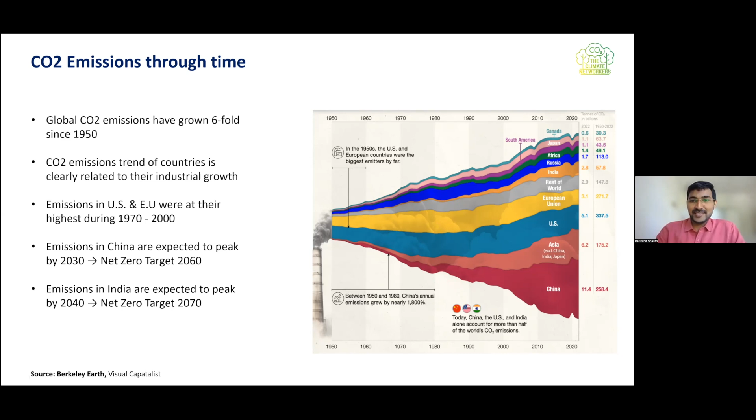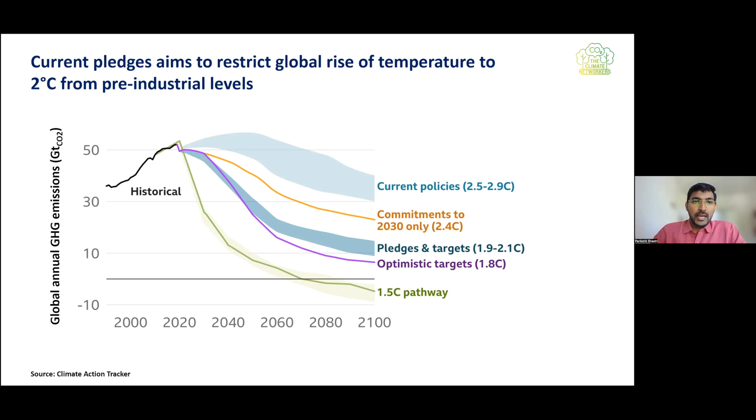Again, it relates to the different transport field or also the building industry. Luckily, I come from the building industry, which is basically the cement industry. Cement industry is one of the major emitters of CO2. That also means there is a very high potential of CO2 mitigation in this field. Based on this, I would be able to give you a nice perspective with regards to what could be different CO2 pathways that have to be implemented in the cement industry.

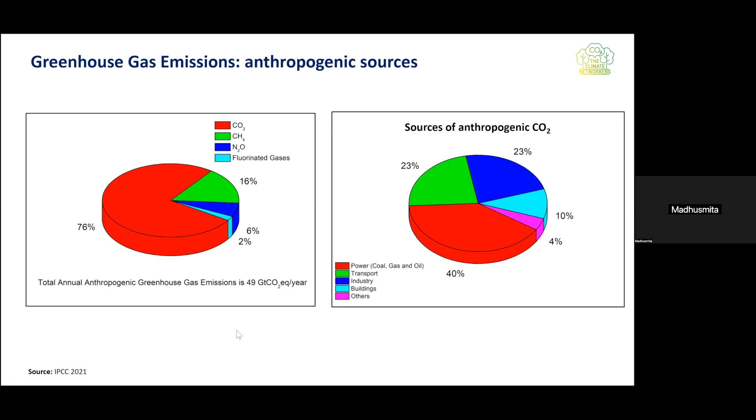Yes, please continue. Okay, so this was more or less about which is the greenhouse gas that we need to target, and on the right hand side we see which are the industries that we need to target when it comes to the mitigation part.

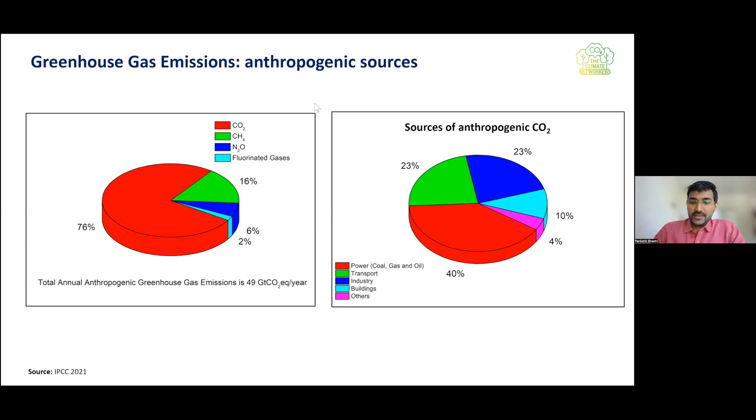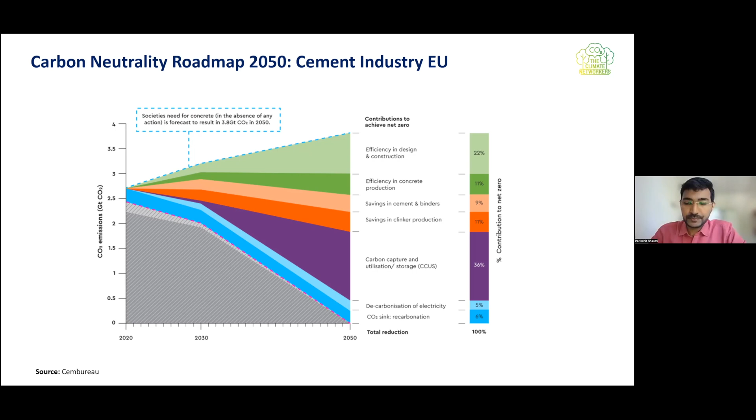Typically there are two major sources. One is the diffused source, which means CO2 that we see in the environment around us or in the air. It's called a diffuse source because the CO2 concentration is minimum, approximately 300 to 400 ppm.

Another source is a point source, basically the industrial sources of CO2. Here we find CO2 in percentage at the stack area, which is basically 5% to 30% when we come across this stack area. The stack area is at the end of the process in, let's say, a cement plant or power plant, where we typically have 5 to 30% CO2 on a dry basis.

So what we see is it depends on exactly where we would like to remove CO2 from - is it a diffuse source or a point source. Based on this, the carbon capture technologies are implemented.

Again, once the technologies are implemented, what we get is either a liquid CO2, most probably, or it could also be a gaseous CO2.

Then it comes to the transportation part. There are different modes of transportation that we would be seeing in detail. And then we get an option - should we go for storage or should we go for the utilization part? This depends clearly on the business case in a particular region.

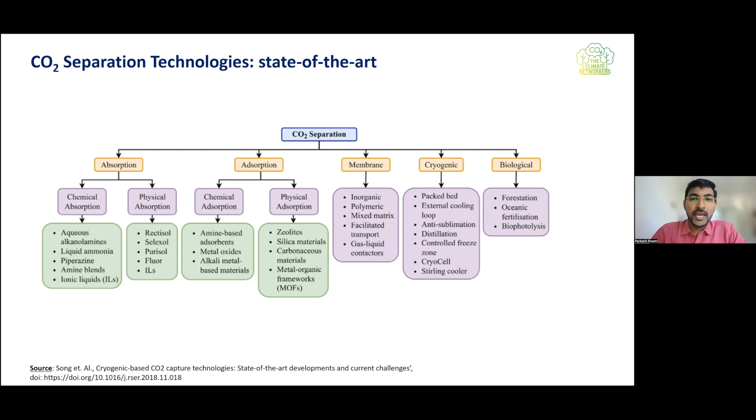This is not something that is typically done. The technology has to be implemented in a relevant atmosphere or environment, and then based on that it is upscaled to the different industries or kilns. Then what we see is typically the post-combustion and pre-combustion processes, which are technologies at a higher technological readiness level.

So what are typically post-combustion capture technologies? We have already seen these. Post-combustion means once the combustion has taken place, these carbon removal or carbon capture measures are implemented at the downstream part of a plant, meaning once the flue gas has been treated and cooled down, just before it is sent to the stack, we remove a part of the flue gas and treat it. This happens after combustion, so it is called post-combustion capture.

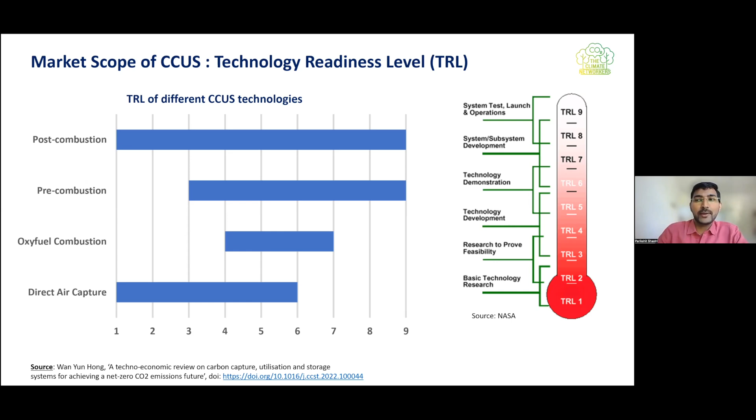What I have selected is a post-combustion capture technology, which is quite prevalent in different industries as of now. I would like to give an overview from an industrial perspective based on ongoing industrial projects so you get an idea of how exactly that is implemented. Coming to post-combustion absorption-based CO2 capture, this is based on a solvent absorption process.

What happens here is that flue gas, taken from the downstream part of the plant just before it is sent to the stack, has a major proportion of dust removed, giving us our raw flue gas. Initially, what we have is this CO2 gas or flue gas at approximately 100 to 150 to 200 degrees Celsius, depending on which point it is taken from.

It is important that we cool down this gas. Inside the carbon capture system there is a pre-treatment part, wherein we cool down the gas before it is sent to the absorption tower. This cooler could be of different types—it could be a quench cooler wherein we circulate cooling water in a counter-current flow, or it could be a coil heat exchanger. But typically what is used is a quench tower. So the flue gas is cooled down and then sent to the absorption column.

Now what happens is in the absorption column, we have a solution which is absorbent, and that solution is sent from top to bottom, and our gas goes from bottom to top, and they have a counter current exchange. And what happens, because of the affinities of CO2 molecules towards the solvent, this CO2 is just trapped in the solvent. This solvent goes to the pump, and from this pump it is sent to the desorption column.

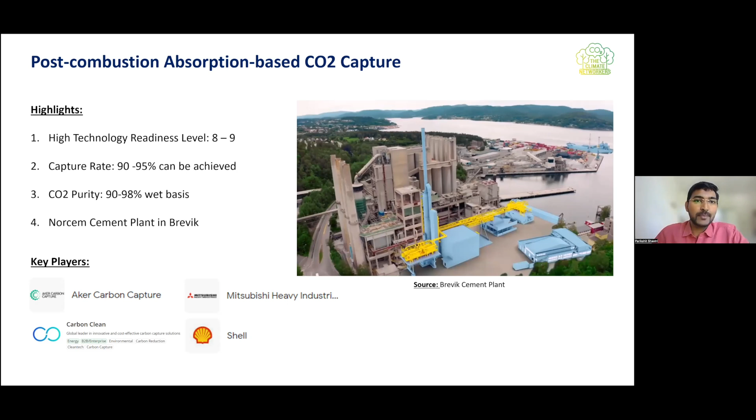Now, this was about the absorption process. Absorption process, as I mentioned, is again a post-combustion capture process, and it is at a higher technological readiness level.

So the next part that we are going to see is a membrane-based process. Membrane-based process is something that we are seeing has been recently implemented. It is not at a very high technological readiness level, but again, what we see is it clearly depends upon how the business case is, what is the capex, and what is the opex for this particular plant.

These membrane processes are driven based on the permeation rates of individual components. What we see is the flue gas is typically taken in, and as I said, this flue gas requires a pre-treatment. If that has to be temperature regulated, the dust has to be removed. It's like in cement plants, we have significant amounts of dust in the flue gases, and therefore it is crucial that we remove this dust before it is sent to membranes, to avoid choking. So if our flue gas is at, let's say, 200 degrees Celsius or 150 degrees Celsius, it has to be cooled down to, let's say, 30-40 degrees Celsius, depending upon what kind of membranes we are using.

Again, what happens is flue gas is sent to the membranes, and based on the permeation rates or the permeability of the membrane - basically the performance of the membrane - we see the selective absorption or selective permeation of CO2 over the membrane to varying degrees, and based on that, the first degree of separation occurs.

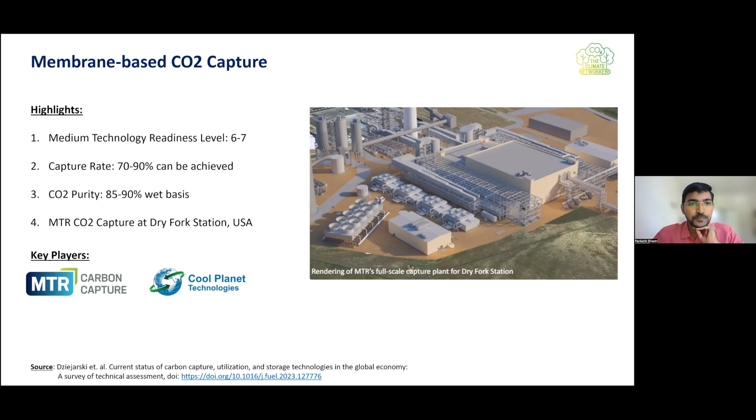So if we look at a situation where we are given food grade purity as our target, we can easily see that we won't be able to reach it with either of these two technologies. That's where the final concentration or final treatment of CO2 comes into play - that is cryogenic separation. There are different players as far as cryogenic separation is considered.

Importantly, the feed gas here should have a purity of minimum 85 to 90%. It doesn't make sense to implement a very expensive cryogenic process at the start of our process, where we have, let's say, 5 to 30% flue gas concentration, because firstly it is a high pressure process, and high pressure involves significant compressor energy.

So it doesn't make sense to involve cryogenic separation at the start of any capture concept. Typically, this separation takes place based on the condensation and desublimation properties of the gas. The feed gas initially goes through a dehydrator, or dryer, based on typically temperature swing adsorption processes. This feed gas, which has moisture in ppm areas, is sent to the separator, which could be a kind of Joule-Thomson effect triggered separation, or it could also be a rectification column depending on the concentration at the start of the flue gas.

So what happens here is it is cooled, sent to the Joule-Thomson expansion device, and then sent to the rectification. Here again we have a reboiling part, which boils out the CO2 and the inert gases, and these inert gases are sent back to the compressors.

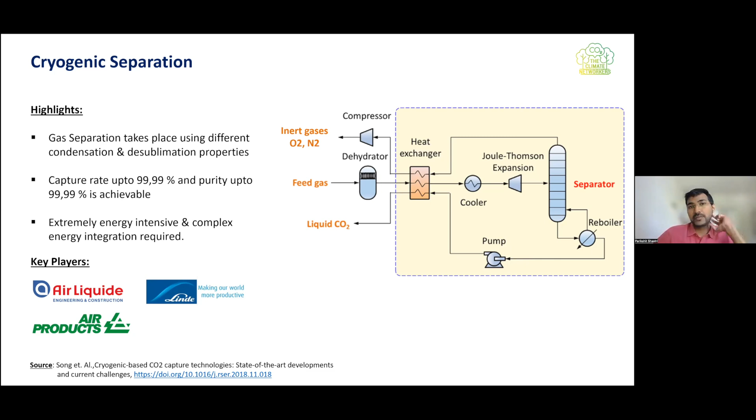So typical players are Air Liquide, Air Products, Linde. There are new players like Chart or something, but they are kind of limited to particular geographies. So as a chemical engineer, we have to look for different technologies that are there, what technological partners they work with, and based on that proceed with the implementation part.

Which basically means, and that is the beauty of the entire process, a chemical engineer has to understand what is the current concentration of flue gases and where exactly we have to reach, what is the business case, and based on that select a technology that is a combination of energetically most efficient processes. That's the beauty of the entire process, and something a chemical engineer should find challenging as well as interesting.

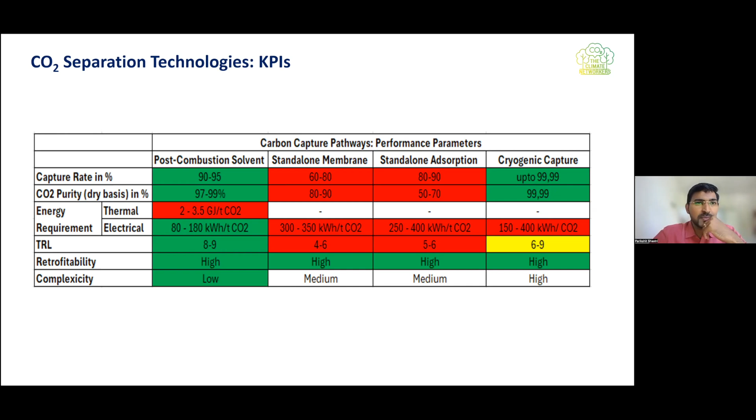So this was about the KPIs, key performance indicators, of different separation technologies. Now, once it is captured, what is important is how exactly that could be sent or transported. Again, there are different ways, different transport methods: it could be pipeline, ship, truck, or rail.

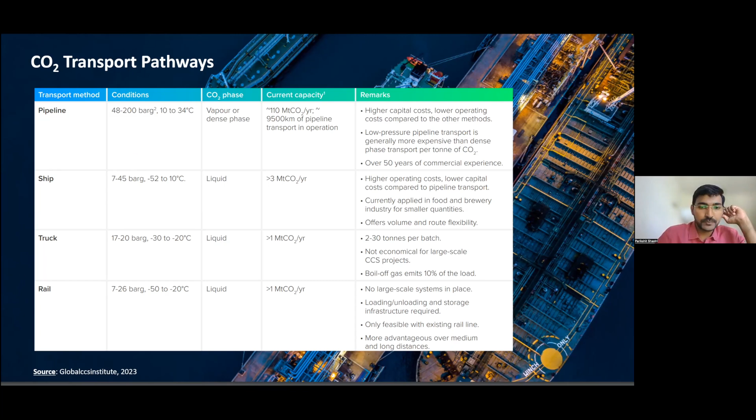This is a very interesting project. Many students who are already familiar with this Northern Lights project must have knowledge regarding this. This is the same project I showed initially when demonstrating implementation of post-combustion capture in a cement plant. It's the same cement plant we see here. CO2 is stored on shore, and since it's very near the port, CO2 carrier ships are implemented. These carrier ships take the CO2 and send it to an intermediate storage. The intermediate storage is then responsible for reaching a particular condition of temperature and pressure, so that it would be suitable to be injected inside the saline aquifers. This video will make clear how exactly this process takes place graphically.

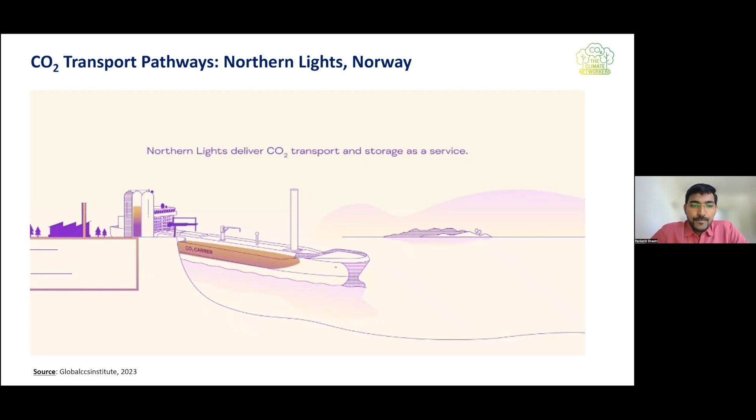So this is that intermediate storage or terminal.

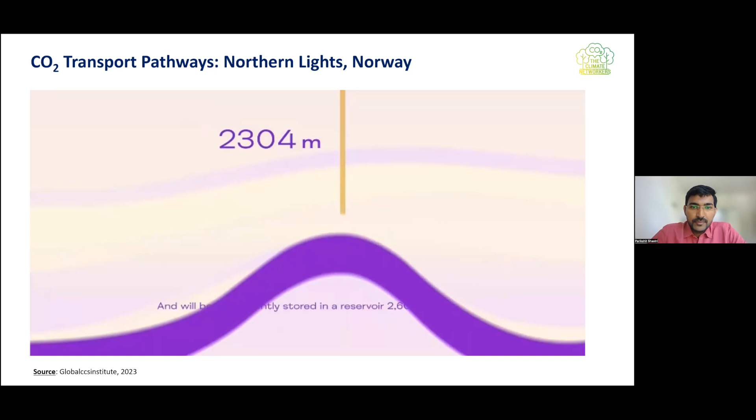What we've seen is basically a typical capture site. Since that capture site is close to the port, we could have ship transport. In ship transport, the CO2 is stored at an intermediate storage, which is the final step for adjusting process conditions before the CO2 is sent to the subsea level.

Once these process conditions are reached, it is pumped through insulated or uninsulated pipelines in a single phase, that is liquid CO2, and sent to reservoirs deep, let's say 2 to 3 kilometers undersea. This is quite crucial regarding what kind of licenses are foreseen for different companies. The North Sea has become a hotbed for CO2 storage, and you'd see news of more companies buying licenses for CO2 storage there.

Now this was more or less about the transport. What is important is to understand how exactly CO2 is stored. There are quite interesting views and counter views. What would happen if the CO2 comes out? When would it come out?

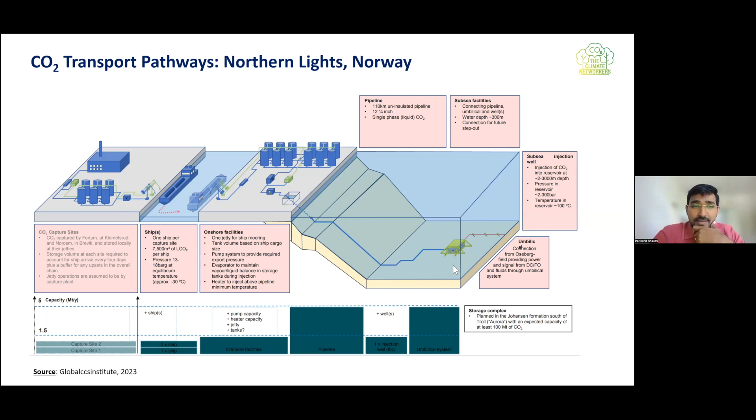Typically, there is an injection well, which we can see here. Let's focus on the left part first. There is always an injection well, as shown in the initial graph at this point, sending CO2 inside beneath this particular station. This injection well makes sure the CO2 is sent to a rock formation which is sandstone rock. Sandstone rocks are typically porous, allowing CO2 to move freely. Such a formation is selected, in this case a Johansen formation, with a layer selected such that there is a cap rock above it.

So this is typical for the Northern Lights projects, or projects more or less focused on the saline aquifer level. This was an overview of the different technologies we saw.

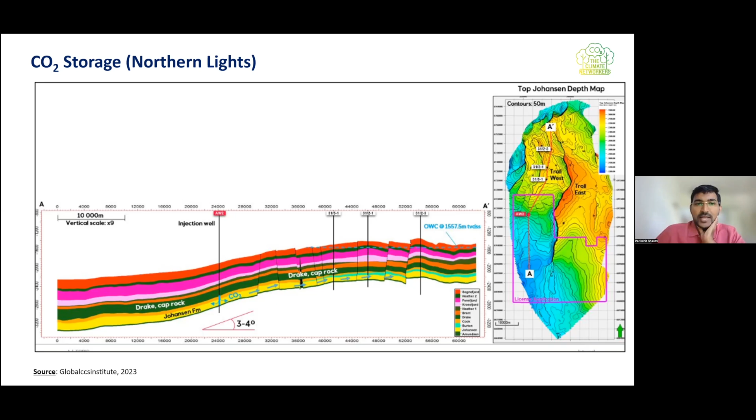For transport and storage, it is very important what the end CO2 purity is. It depends on different CO2 off-takers and how exactly they specify product purity. One example is Northern Lights, which specifies CO2 purity as high as 99.81%, with impurities literally in ppm ranges.

Some impurities could be in ppb ranges, parts per billion. It's not only about main components like CO2, O2, or N2, which are in percentage areas, but also about other components like ammonia, amines, formaldehyde, mercury, etc., that are typically even in ppb levels. Mercury, for example, has to be in ppb levels.

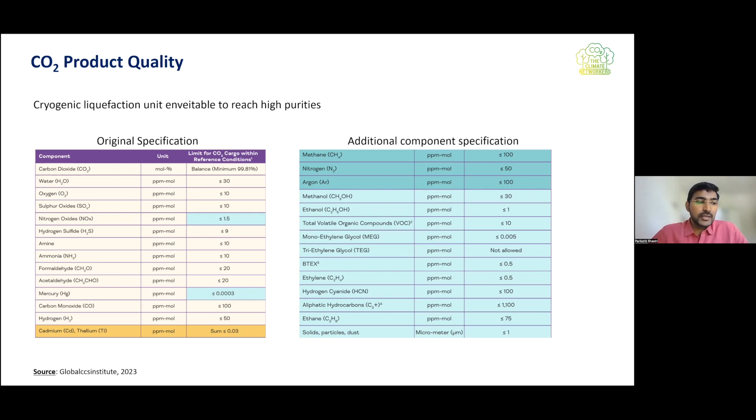These levels are decided by experts researching the material integrity of different storage tanks or storage ships. Based on that, they devise specifications so there would be less contamination as far as CO2 transport is considered. This clearly defines that the end purity would dictate what kind of processes we implement in the upstream plants.

If we look at different indicative costs and ranges, we can see what typically happens with respect to CO2 compression and dehydration cost. In transportation via pipelines, again it is a very broad range depending upon how many kilometers you're transporting the CO2. Long story short, it is important to see the ranges.

For example, once we capture CO2, compression takes let's say 20 to 30 US dollars per ton of CO2, and transport via pipelines or ships takes again an additional 20 to 30 USD per ton of CO2.

We have to calculate the total cost, and even after transporting there are charges for CO2 injection, storage, and monitoring. So roundabout, even if there are technologies that cost 70 to 80 euros or dollars per ton of CO2, additional steps beyond carbon capture could bring the total to approximately 100 to 120 US dollars per ton. So it's not just about calculating a carbon capture price to get the price of the entire value chain.

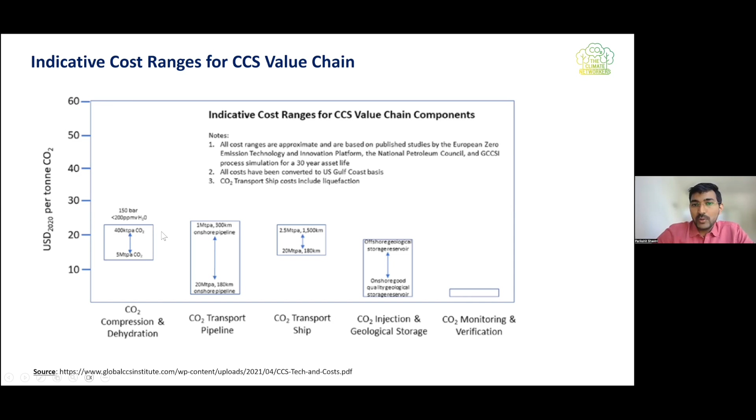We have to calculate the entire price, which could be double the price, or equal to the price of CO2 capture. So if CO2 capture is 60 to 80 euros per ton, we could have a roughly equal price range for the next steps.

So this was about the storage part. About the utilization part, it depends upon different geographies. We have CO2 from different sources that go into capture processes, and then based on these, there are different routes. For example, mineralization routes, where captured CO2 is pumped into concrete so it is stored inside building materials. This is one of the quite sought-after utilization pathways implemented.

What is important is the CCU lifetime. Once we make an e-fuel, or use it for hydrocarbon recovery, it's important to check the CCU lifetime. If the CO2 comes back into the loop after a couple of days or years, we have to think about how sustainable that particular pathway is.

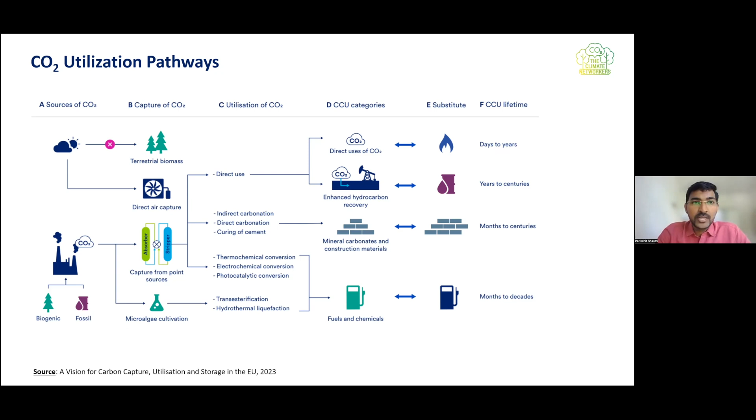With regards to different technologies and pathways for CCU or utilization, it has been used in food packaging, and CO2 has been very prevalently used in industry as industrial gases, in agriculture, food packaging, and enhanced oil recovery. This is a part where the US is a leader, having used CO2 for enhanced oil recovery for a long time.

They have operational experience of more than 50 years for this particular CCU application. What is also used as a utilization case is the beverage industry or carbonation of CO2 inside drinks. For this, food grade CO2 is considered. When we talk about food grade CO2, it is important that it have very high purity levels, and these purity levels would then govern what kind of technologies would be implemented.

The reason I was saying that the CCU business case depends upon geography is that when we look at algae-based biodiesel, or usual algae production based on CO2, it heavily depends on what kind of weather we look at. These implementations typically require hot weather. So like in Algeria, there is a CCU implementation for algae production because CO2 in the gas can help or accelerate the growth of algae. That is again a use case wherein they try to sell dried algae on the market and achieve financial feasibility. So these are different cases.

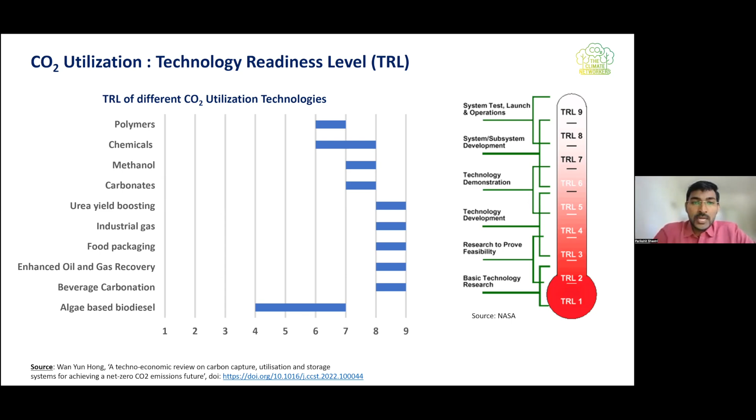As far as trends are considered, in the US geography, they are more or less into pilot or semi-industrial scale plants until 2030, and it is highly possible that beyond 2030 to 2035, industrial scale plants might pick up. In the EU geography, there are already some semi-industrial scale plants that are very near completion and are expected to be operational by 2030. Beyond 2030, we could see a sudden jump in the number of industrial scale plants in operation.

What I see is the US would be focusing on extension of the existing network and more or less on EOR, with some use cases for CCU utilization. What the EU would be focusing on is the transport case, because in the US they already have experience as far as CO2 transport is concerned. That's not the case in the EU, so that could be a bottleneck.

Again, it's a chicken and egg game. Should carbon capture technology partners invest in capture technologies, or should infrastructure providers invest first - should storage be available first, or should the CO2 be available first? It's again a chicken and egg problem that people keep going around in the same loops.

As far as India is concerned, we have seen that there are some small scale plants, and there could be feasibility studies until 2030. What I see is cement and power industry would be the main focus, because there has been funding in these fields in India.

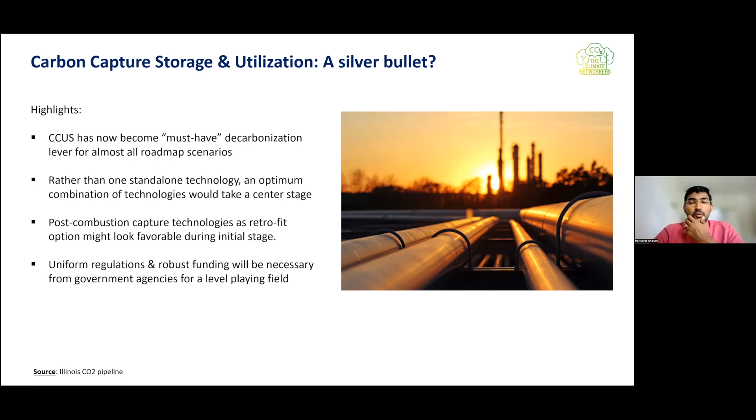This was more or less in a nutshell about how exactly a CCUS value chain functions. Overall, as a chemical engineer and climate enthusiast, we have to understand that CCUS has already taken center stage, and we have a crucial role to play towards the implementation part. And yeah, that's what would be important. So I think this was in short about what we discussed until now.

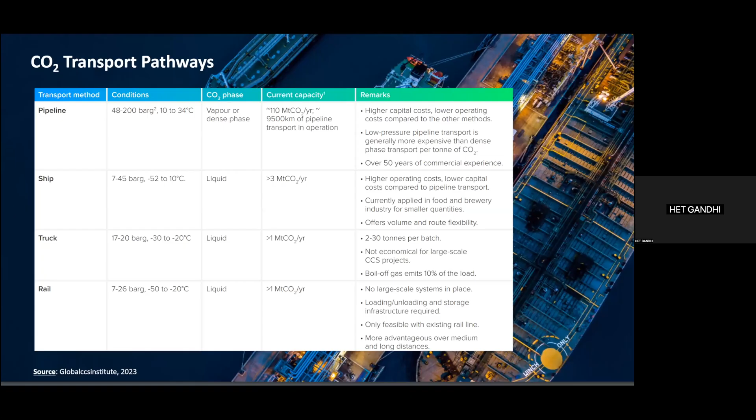So I have just one question related to post-combustion technology. We are using flue gas as feed to capture CO2 from the flue gas. So if in the CO2 we have the presence of sulfur, SO2, because it's coming from the cement industries, is it viable? Is it necessary to remove SO2 first from the system before it enters the absorption column, or can we get rid of it in the absorption column?

Absolutely, that's the reason. Typically, before we reach the absorption column, SO2 impurity has to be removed more or less completely. That's where these coolers come into play. Initially we use quench coolers, because depending upon what kind of SO2 or acidic impurities we have, including NH3 impurities, these have to be removed before we go into the absorption column.

For that we use quench towers, which is a cylindrical column used in such a way that there is a counter-current flow of water, or we mix it with a basic solution, which could be NaOH. Typically NaOH is used in industry, which is able to reach approximately 95 to 98% of SOx removal.

But what happens is SO2 is not the only sulfuric component we have in the flue gases. That also relates to H2S and SO3. It's very difficult to measure these components in the flue gas itself, because towards the stack, if we cool down the flue gas, it becomes saturated with water. So imagine measuring something in a saturated flue gas - it's quite difficult and the measurements are not very accurate. Besides, it's difficult to measure the bifurcation between SO2 and SO3.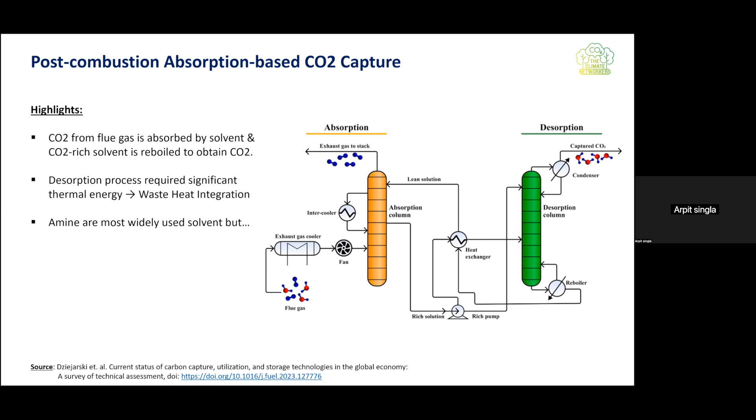It basically depends upon the solubilities. We have to look at what kind of solubilities we have, because if we lose a lot of CO2 into the water itself, which is typically taken out, then it won't make sense as far as the option is considered. Typically, a very marginal portion of CO2 gets converted and goes with the water. The majority of the SOx are carried away with the basic part, because SO2 has a higher tendency to react, and that's the reason we see SOx more or less removed, let's say 98%, based on what we implement as the basic component. NaOH could be used as a basic component, it's a mixture, let's say 40 to 50% NaOH typically used in the quench tower, and that majorly removes the SOx. So CO2 does not significantly go towards the formation of carbonic acid. It depends upon the selectivities, the affinity is more towards the removal of SO2, so only a very marginal amount of CO2 goes into the water.

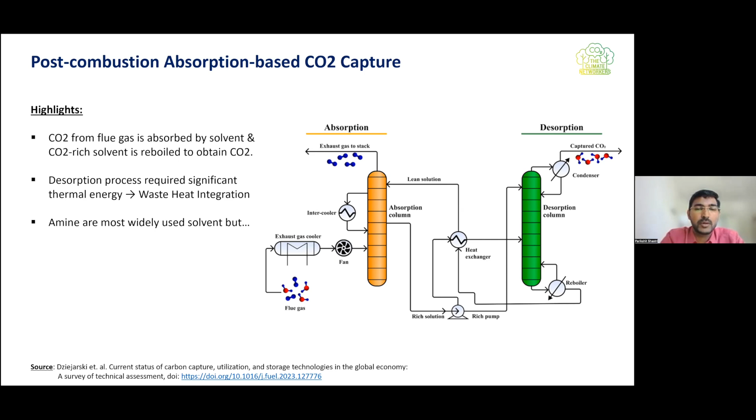Okay, thank you. Welcome, welcome.